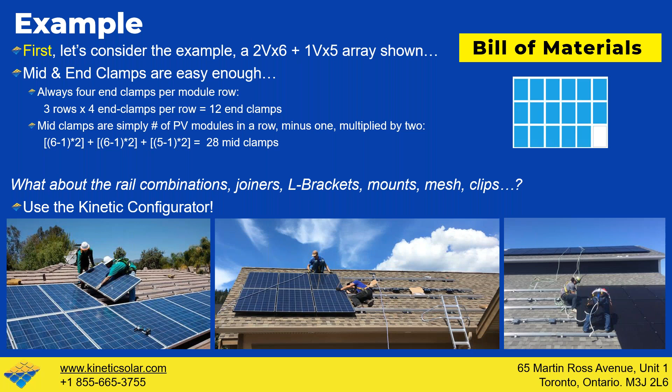So the configurator was developed just to make this as easy as possible. So when you go to our website and you open the configurator, you will see this screen. You'll simply just put in your project name and which region the project is located in.

Based on the project location that you specify, the wind, snow, and rain will be automatically pre-filled. And then you'll select if the terrain is going to be open or rough. And open is, of course, your open fields. Maybe it's adjacent to a lake or a pond, a big open area without much surface obstruction, such as trees in urban areas. And then rough would be quite the opposite.

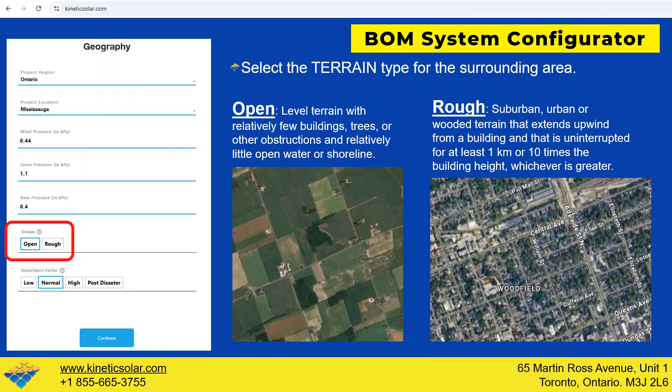Importance factor. So a low importance factor would be a building that has low direct hazard or indirect hazard to human life. This would commonly be a storage shed, maybe a warehouse if it's primarily designated as storing materials. But as soon as there's people being introduced, the lowest importance factor we would typically recommend is going to be the normal level.

And then high would be anything where there's a high importance, such as a school, a library, a hospital, and of course, any facility containing hazardous materials, such as if it's flammable or explosive gases held under pressure. And then post-disaster, which would be a gathering place of a very high importance. So this could be a stadium or other places like that.

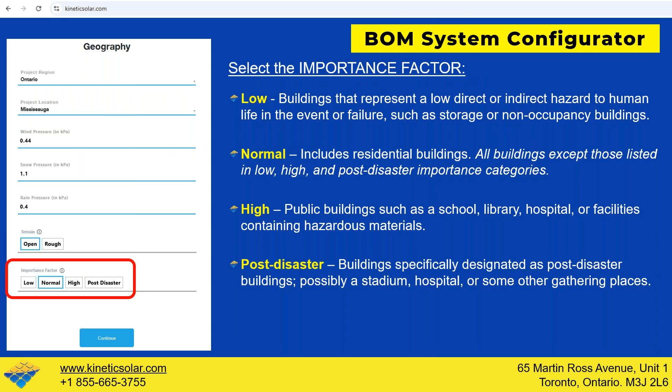Next, you'll choose your roof slope, building height, and roof type, if it's shingle or metal roof, and then your truss spacing. So the truss spacing you might specify as 24 inches. And if the system allows, you'll be able to enable a 48-inch connection spacing. So the truss spacing you select on this screen is separate from the actual connection spacing that could be permitted, which comes later.

You'll choose your module. So you'll choose the manufacturer, and then there'll be a filtered list of modules underneath that. If you ever find that your module that you're using is not included, shoot us over an email to any of our email addresses, info or engineering or myself, Matthew, at kineticsolar.com, and we will just get that updated.

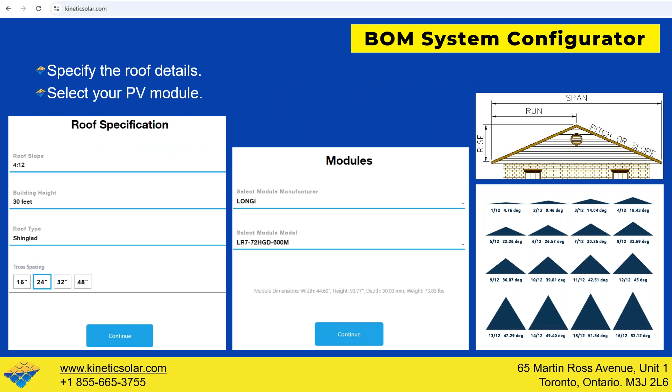So after you do that, you'll be looking at this screen. You'll see a visual representation of the layout that you specified. So here we have 3 rows of 6. Then you've actually clicked on that 3rd row last module indicated there, and that removes the module from the array to get our 2 rows of 6 and 1 row of 5.

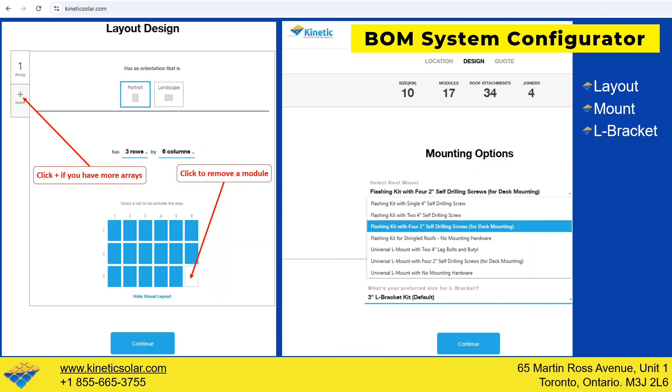On the next screen, once you're done with your layout, you'll specify the mount connection that you want to use. And in this one, we've selected flashing kit with 4 2-inch self-drilling screws for deck mounting. You'll also have some options here if you'd like to include a cable raceway, microinverter optimizer mounting kits, and of course, rodent guard protection mesh.

And then you're done. You have your bill of materials here, and you can take a look through. You can choose to add some spares if you wanted to have some spares added. And then you can print that report and deliver it to your contacts over at BayWa, and they'll be able to fulfill your order based on that bill of materials.

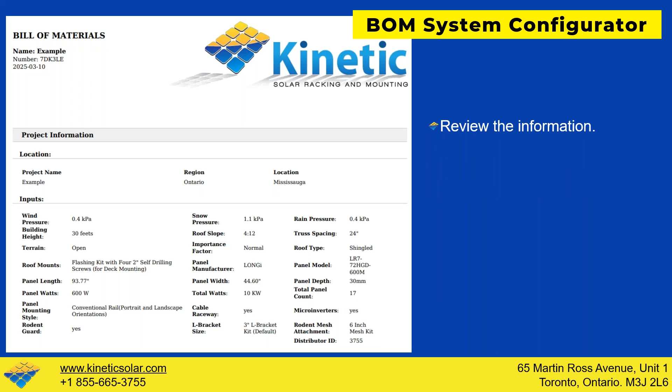You're also left with this report that you can download for your own project records. It includes all of the details you've input, and of course, the bill of materials that you can file away in your project files. In that report, you also have a good description of the racking composition. So you can see here where we have that 1 dash, where the rest are zeros. That 1 dash is where the 1 module was removed.

And you can see the rail composition is being explained here. Rail 0 is essentially your uppermost rail near the peak of the roof, and it's comprised of 2 138-inch rails in this example. And then if you look at rail 5, for example, the last one on the list, it's made up of 1 256. So you get a good overview of the composition of the racking system.

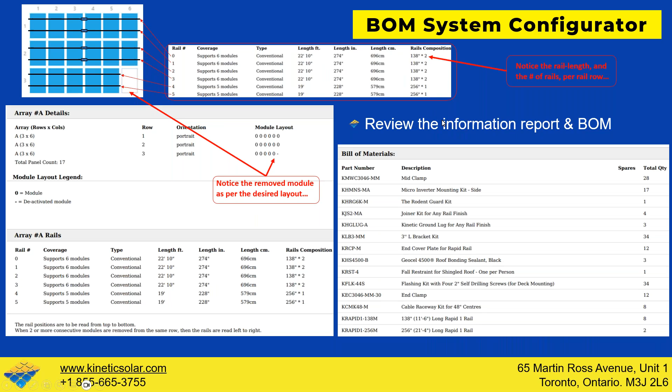Next, we're going to get into some of our components. I imagine a lot of you are quite familiar with some, but maybe not all. So if you have any questions, do feel free to put them in the chat. This, of course, is our rapid rail, our most popular rail, and specifically used for roof mounts.

Mid and end clamps, they come pre-assembled at a specific height. So when you order them, it's a 30-46, meaning that the clamp can accommodate a 30 millimeter to a 46 millimeter module thickness. Bonding is passed through the mid clamps. Now, if you see that exploded view of that mid clamp, that is our newest mid clamp, which actually integrates the bonding right into the bolt assembly. So you'll see that bonding washer essentially has little teeth that will come into contact with the module frame. Then bonding is carried through the module frames through the mid clamps.

Our clamps are available in black anodized or mill. Black is a really nice finish when you're using black modules up on the roof. It's a very nice aesthetic appearance.

And the mid clamps stay lifted when they're lifted. So as you might imagine, you're going along on your roof, you're slotting in all your mid clamps. They can slide in the channel quite easily, so you can move them over when you're going to lay your next module. But what I find personally really cool is that the mid clamp will stay lifted, so you don't have to grow a third arm to lift that clamp before sliding in that next module.

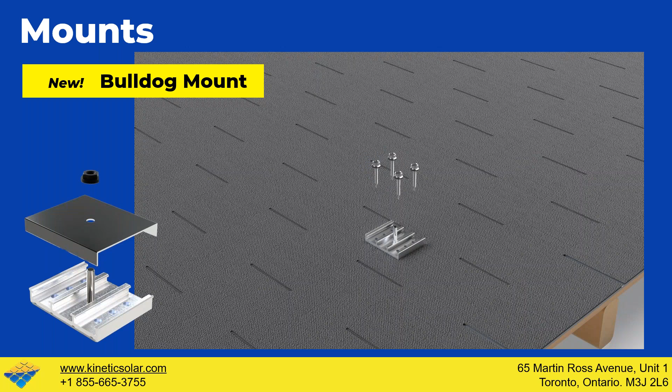Next, we'll get into some of our mounts. Here you can see this is an overview of all of our most popular mounts. So the Bulldog is our newest mount. So this is 4 screws into the decking or 2 screws into the truss. And of course, your decking mount makes it go super quickly, minimum of a 7/16 OSB or plywood.

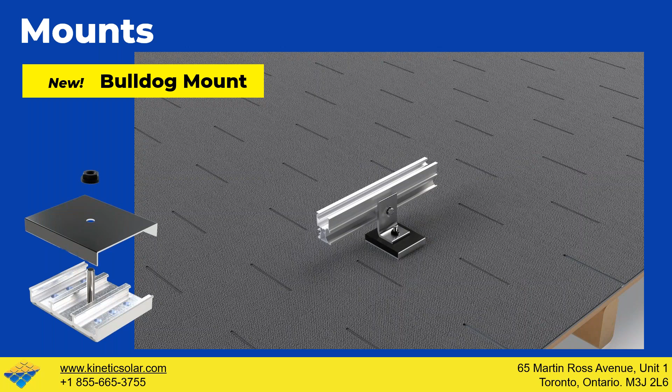So the Bulldog mount can be installed on the roof surface sheathing, trusses, joists, or reinforcing members. The pre-installed butyl layer underneath prevents leaks. So there is a butyl underneath, and if you see on this image on the right, we actually have a little lip that comes down of aluminum that retains the butyl. So even when you have your super hot summers, you can get them in Alberta for sure, super hot temperatures, that butyl will always stay retained with the mount under the pressure and held in with those lips.

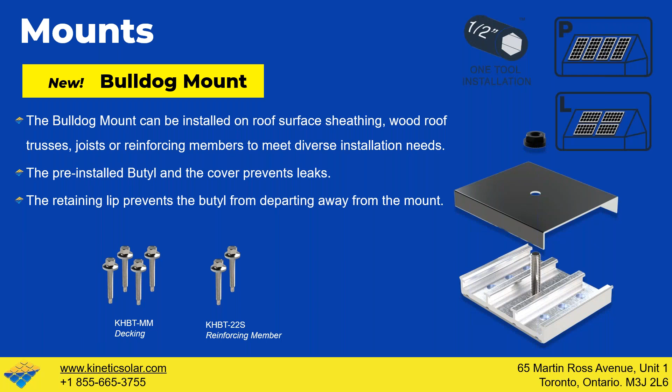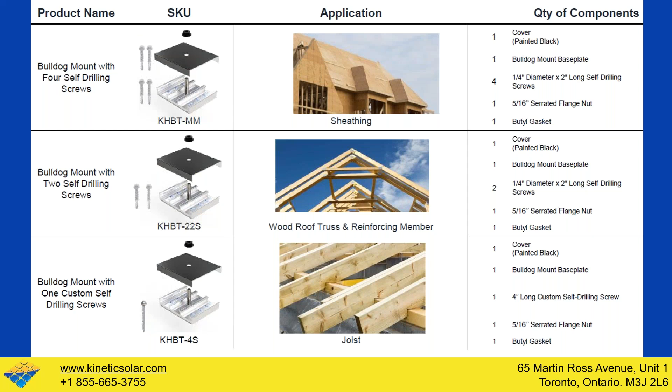So here you can see the 4 screw option and then the 2 screws for if you're mounting a truss. So we have all of our options here. There is a 1 screw option. It's not as popular. We would typically recommend the 2 screws, but if you're already using a single screw option and continue to do that, we do have approval for a single screw.

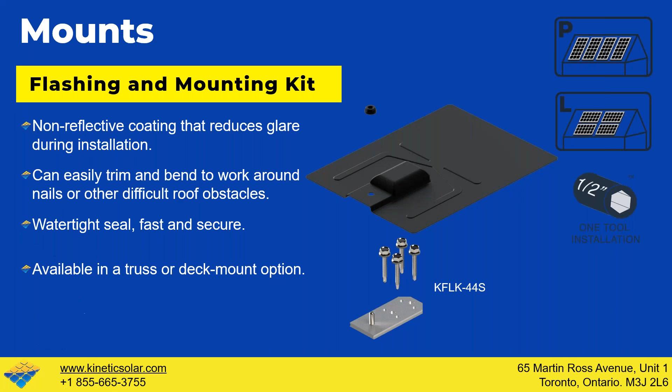Next is the flashing, probably our most popular, most well-known mount solution. So for asphalt shingle roofs, it slides up under the shingle and provides a weather-tight, watertight mounting solution. So it's a non-reflective coating. It's very malleable. If you've ever held our flashings, it's really quite unique. You can bend these and cut them quite easily if you have to get around a nail or some plumbing stack or anything like that.

Easy to trim, easy to bend, and they bend right back without wear. So you can bend these things in both directions 100 times. And like you might imagine with some metals that might snap, this one is just so ductile. You can just keep bending it and it'll go right back. So this is also available in a deck mount option. So here you can see our 4 screws, but otherwise it is 2 screws into the truss.

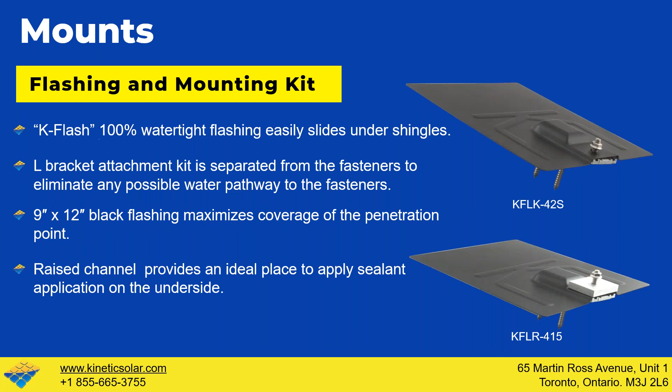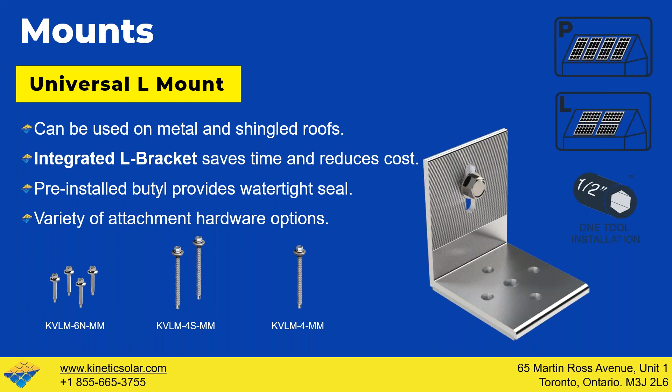Next, we have our Universal L. Very quick installs, of course, just taking the mount and integrating it right into the L bracket. So also available in a deck mount and truss mount option. It includes a butyl layer underneath to provide our weatherproofing. And it's a really popular solution here. I personally installed these and it makes for a very quick install.

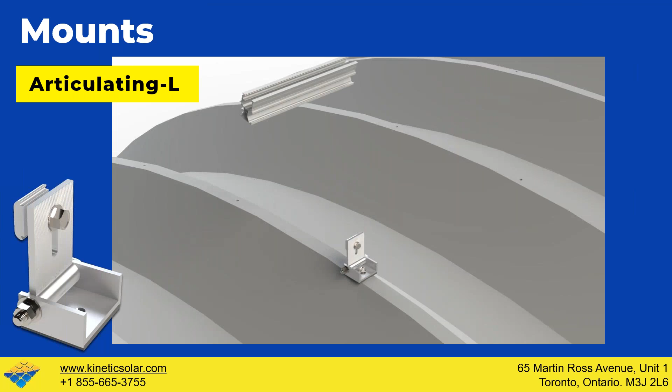We also have our articulating L, which was previously called the Quonset hut mount. It was designed specifically to mount onto Quonsets, but can really be helpful for any kind of change of plane racking solution. So you might have a roof at a steep slope going to a shallow slope, and you want to mount your modules right across that change of slope. You can do that with the articulating L.

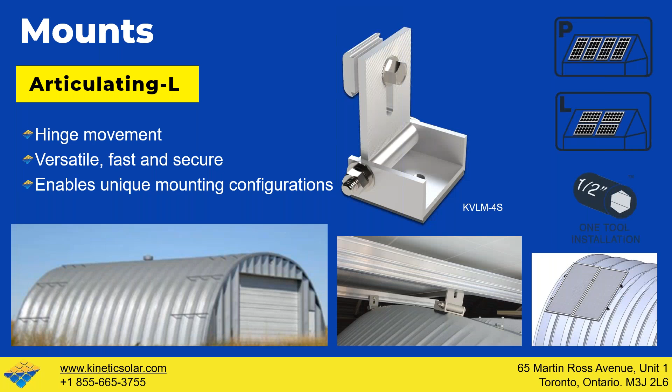So here you can see it installed close up underneath of the Quonset and how that looks. So basically those rails can rotate independently, and then they line up with where they need to be to mount the module.

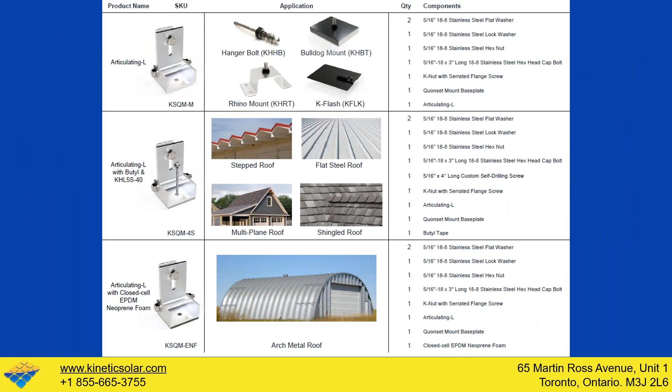We also have the giraffe mount, which takes some inspiration of including an L bracket into the mount. And this will mount so that your rails are sent up the roof slope. So you can still mount portrait. It'll just from the ground appear that the modules are mounted in landscape orientation, but they will be clamped on their long sides in portrait, as is the most cost-effective way to mount modules.

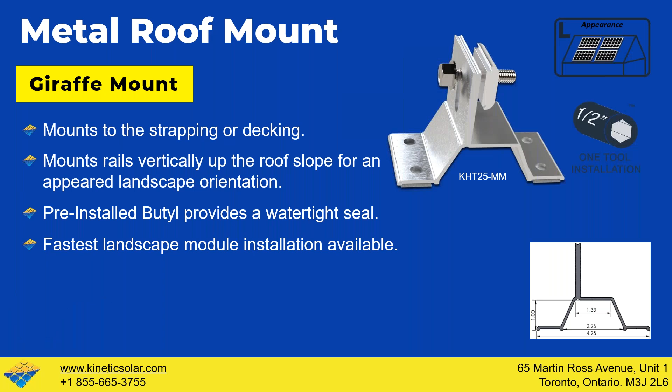And it mounts into the decking, if you have decking that is 7/16 thick, but most commonly on a metal roof you would have strapping, and these would be mounted into the strapping. You'll see as well, we have those little retaining lips there. So the butyl is held in place and provides a weathertight solution.

We also have the rhino mount, very similar to the giraffe, but the rhino does not include the L bracket. This provides you a number of unique solutions. If you wanted to mount diagonally across the roof, so rather than sending rails up the slope or across the slope, you can go diagonally across the slope. And this can create really nice aesthetic finishes if you have a certain feature of roof that you're trying to navigate around. It can be very helpful.

So it's a very tall gap there. You can straddle a seam or a rib of a metal roof and still tap into the strapping there. You can see that's a 1 inch high that it can jump over.

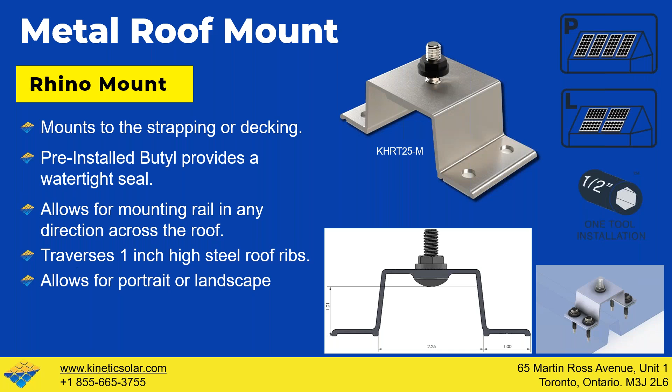Of course, we have hanger bolts. These are our custom hanger bolts. They are self-drilling for lumber, so you don't have to pre-drill. If you were to pre-drill, you just want to make sure that you're using the right size of a drill bit so that you do get all the thread that's needed for that pull-out strength. So it's available in a 2 inch, a 4 inch, and a 5 inch. The 2 inch we haven't listed here. It's not as common, but some specialty projects do require it.

And what's cool about the 2 inch hanger bolt is that it can be self-threading. So if you were drilling into, say, a steel Z-purlin on a commercial building, and you wanted to mount hanger bolts into that steel Z-purlin, or Zed-purlin, because we're in Canada, you could accomplish that with the 2 inch self-threading hanger.

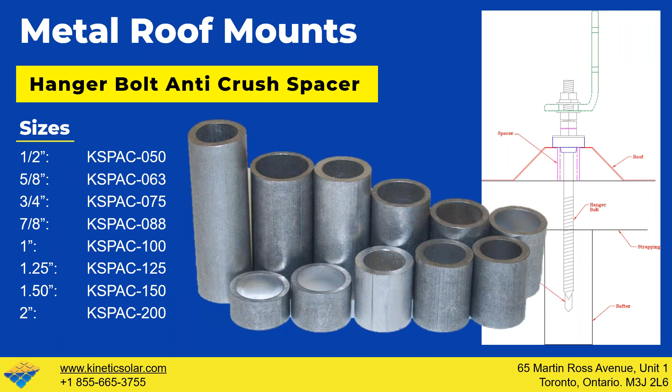Now spacers. If you have an air gap, as depicted on the image on the right, you can see that we're on the top of that trapezoidal roof profile. There is an air gap underneath. Now, if you don't have that spacer inserted there, what's going to happen is when you tighten down that hanger bolt, you're going to compress and crunch that metal roof profile. That'll create a place where water could collect and get in underneath the roof. So including the spacer allows you to really tighten that hanger bolt all the way down without crunching that metal roof profile.

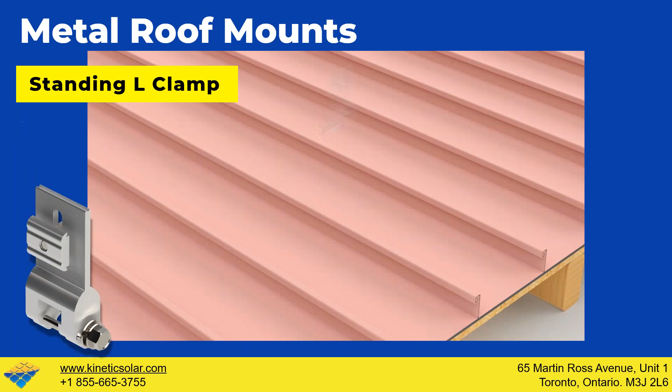Of course, we have our standing seam, a very popular solution, very universally applicable to most standing seams. And on the cut sheet, we actually have the dimensions of the cutout profile, so you can make sure that it will fit the standing seam that you're looking at.

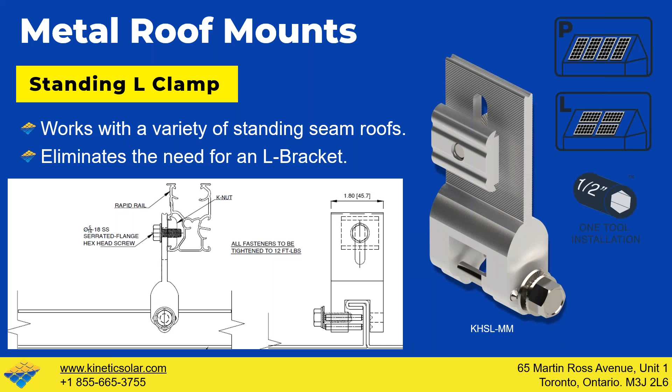And a really great feature of this standing seam mount is that the bolt that you tighten isn't what's coming into contact with the metal roof. The bolt that you tighten is going to push these pins in, and the pins don't rotate and will not strip the coating on the metal roof. So it won't cause a rust point. And that's definitely a big feature to highlight to any end customer, that you're using a product that won't damage their roof.

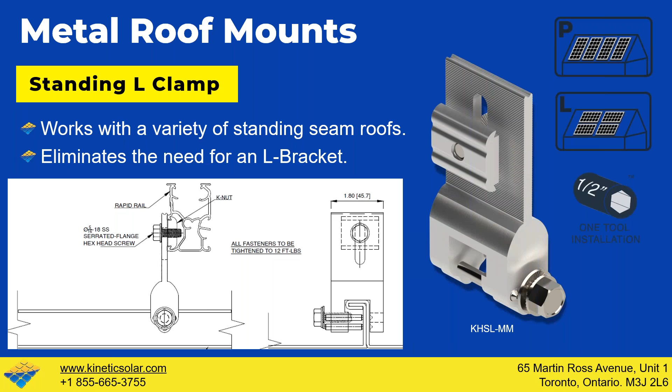Accessories. So here we have our top or side equipment mounts. So whether you're mounting a junction box, a microinverter, an optimizer, or anything else you decide to put up on the roof, you can accomplish it with the equipment mounts for the top or side of the rail.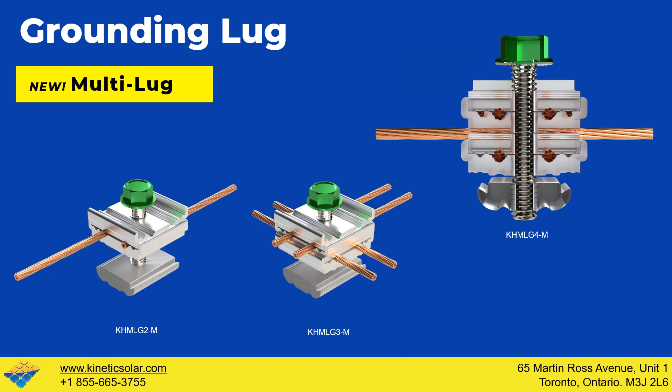Next, we have our cable raceways. So these are available in kits. So if you're using an on-center connection spacing of your mounts at 16 inches, you would use the 16-inch kit, and so on. If you're at 48 inches, you'd use the 48-inch kit.

Of course, this would provide a full cover of the cables, so it can be a really nice mechanical protection for your conductors. And it is something that would be required to attain a fireproof rating. Part of the fireproof testing is they actually plunge a fireman's axe straight through the modules on the roof. And with this cable raceway, your conductors would be fully mechanically protected.

The cable clip tie. So a lot of people are using zip ties. I've done it for sure. But what can happen is that when you wrap the zip tie all the way around the rail, you're going to cause stress points on the zip tie itself. Now, of course, some zip ties, especially premium ones, are very strong, and that wouldn't necessarily be an issue. But I have seen, unfortunately, some zip ties that are not UV rated and also not the strongest, where they will cause failure points, and those cables might eventually come loose off the rail.

So what this product does is allows you to clip these all along the rail so that when you come by later to run your wires, these can already be in place, and very, very quickly, you just put that in and then zip it shut. So it can help save time on the roof as well.

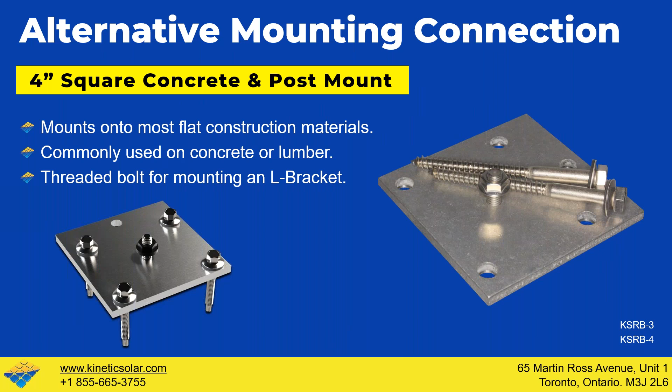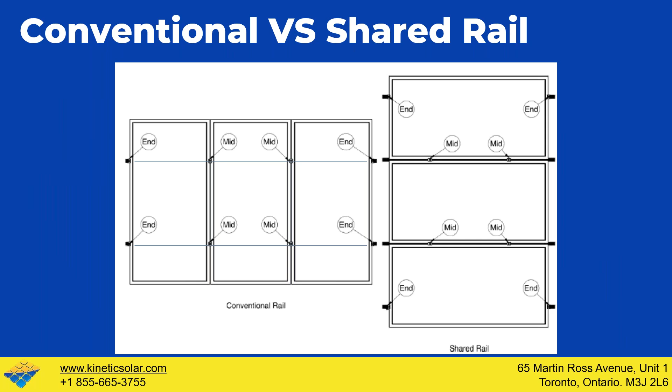Here we can see a direct comparison of the same roof layout. You can see that we are using 30% less rail, 30% fewer mounts, and almost the same number of clamps. So the big difference here is you're using less rail and fewer mounts.

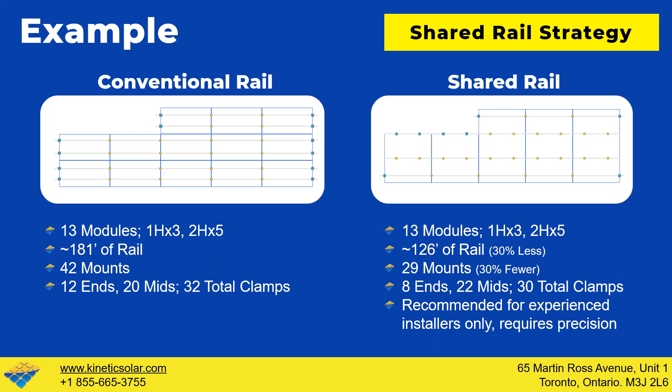That's less time on the roof. We don't recommend this to someone doing it for their very first install, but for those familiar with the processes of installing a roof mount system, there is a slightly higher level of precision required when installing a shared rail system.

Since it is slightly different, I wanted to show a graphical representation of where exactly those mid and end clamps go. You can see the first rail at the top and the last rail at the bottom are what we would refer to as conventional rails.

They're brought in from the edge. You're clamping in the green zone, but you're clamping on the short side. Now, all of the rest of the rails are actually clamping on the module's long side, still in the green zone, but you have a bit of short side and long side clamping going on here. And you can see where those end clamps are located.

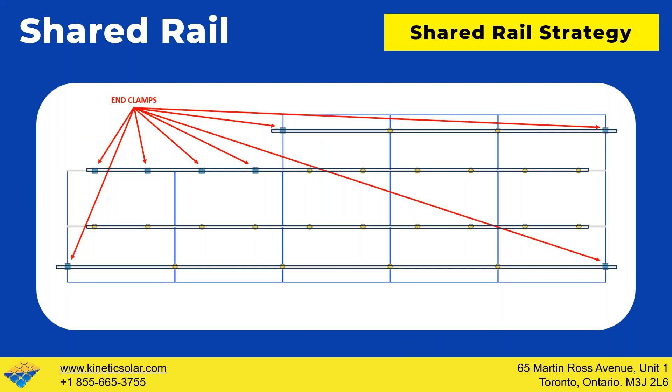This isn't to clamp, this isn't to do anything other than just provide a guide, to help that process go smoothly, make sure that the spacing is being maintained, and it actually gives a slightly larger surface area for the module to sit on.

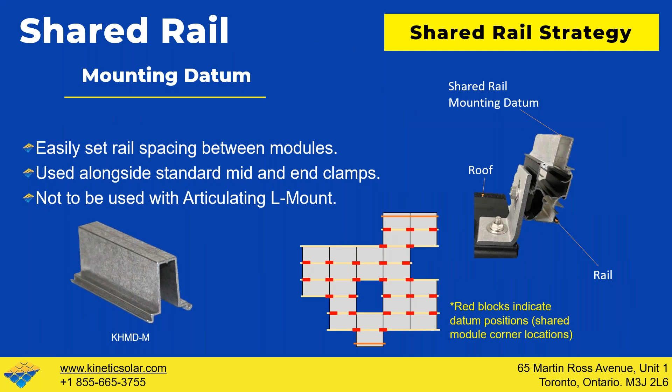And you don't need someone to stand there and hold the module in place before the next clamps go in. Once you have the datum in place and you're putting your module up above it to rest on it, it can just sit there without sliding off the roof.

Next is our ground mount. This is our Gen 2 static. Some people might be familiar with this. This is with our round bifacial rails, and we have these datum holes that help guide the installation for ease of install.

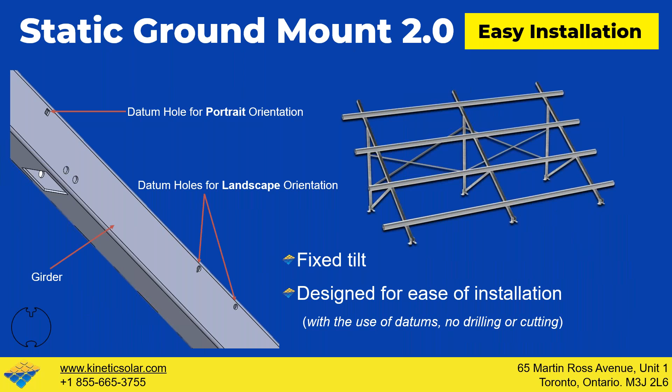So it's suitable for PV modules up to 2450 by 1160.

Minimum shadow for the backside of the bifacial modules. So we have our round rails, and we've run some science on those rails, shining light from the back. What's interesting is that a round profile actually casts less shadow onto the modules, providing higher reflectivity and backside energy efficiency.

So we engineered this for wind loads Q50 up to 1 kPa, snow loads of 2.5, and rain loads of 0.8. Keeping in mind nationwide compatibility, this has really been designed quite robustly for Canada.

The frame itself is steel, hot dip galvanized, and the rails are extruded aluminum. It's a fixed tilt of 40 degrees, and it comes with our long warranty of 25 years. It uses all the standard mid clamps, end clamps, and ground lugs.

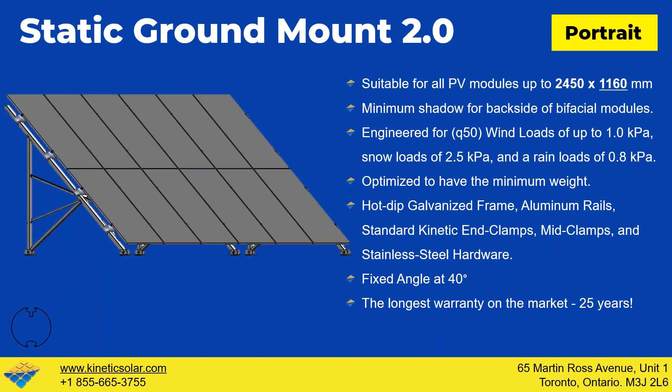Here we can see another angle. You can see here how the round rails are being mounted to those square girders. We have our square U-bracket to accomplish that, and the datum pins are essentially what holds it in place.

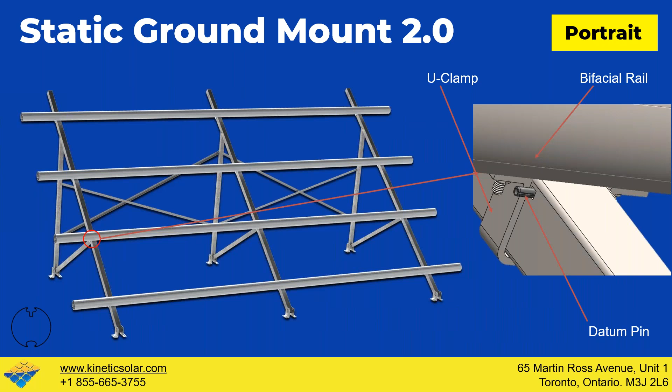Here's a cross section of that bifacial rail. It can accommodate spans of up to 125 inches between the supports, and cantilevering over the edge 52 inches.

We also offer these end caps, which prevent rodents and birds from nesting on the inside of the rails. The caps themselves we make in-house, and they're certified and rated within a wide temperature range of what you could expect to find.

The foot design allows for half-inch increments of adjustment. That is those diamond pattern holes there of how the foot actually mounts to the square tube strut.

So what that means is that if you're starting your install, you want to mount your first foot on the highest point of the foundation at the lowest hole. Then when you go to mount all of your other feet at possibly, but hopefully not, different heights, because your helical pile might be a little bit higher over here and lower over there, or your concrete ballast.

This gives you a good amount of adjustability vertically and slightly horizontally, just to make sure that you'll have a level system, even if your foundations are not all exactly level.

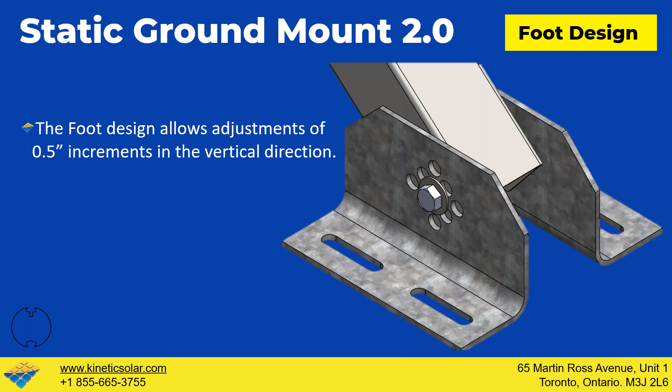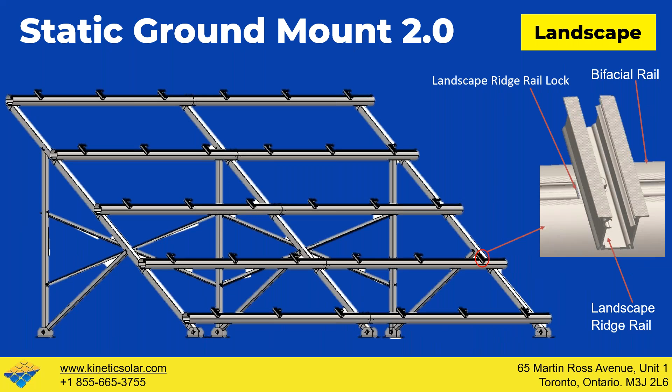You can see on the bottom side channel, we have that bifacial rail mesh stud nut. That's a separate component that can be ordered separately to mount that 48-inch mesh. It makes that installation of the mesh quite easy, using a K-nut of our standard K-nuts to fit into that channel and then mount the mesh with a K-nut and bolts.

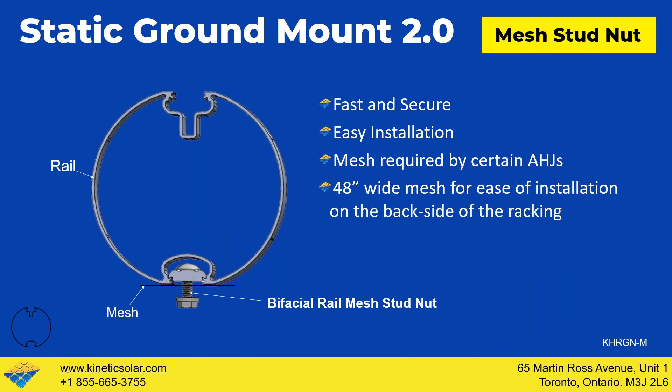We're excited to announce our new Gen 3 adjustable ground mount. You can see that here. It stocks and ships on a pallet.

So this is something that we're really excited about, being able to ship these on pallets. We have a really nifty video here where you can see the assembly coming from the pallet to assemble the adjustable tilt rack.

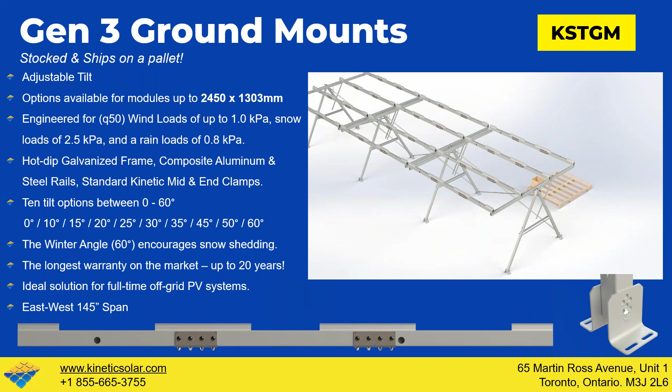The rack itself offers 10 different tilt adjustments if you include 0 as one of them. Someone might be inclined to mount the rack at 0 — let's say you had a hurricane passing by, the 0-degree tilt would be preferable for that. You can go up to 60 degrees for snow shedding in the winter, or if you're just further up north, you might even just leave it at 60 all year round.

So it's hot dip galvanized, composite of aluminum and steel rails. The rail itself we can see along the bottom of the screen here, and what you see there are the U-brackets that join them and splice these rails together to form longer sections.

So each table on that rack image, we have 3 articulating tables, and each one will tilt independent of the others. We have those adjustment bars where you just slip off a cotter pin, pull it off the pin, then move the bar, reset it, and then you've got your new tilt.

I've adjusted some of these when we did our most recent show, and it's very easy. We have dampeners that help make the movement easy, and of course if you were to let go for a quick second, it's going to dampen the movement of the table.

So we actually have really incredibly wide spans here that will reduce the number of foundations you require. Our east-west span on this rack is 145 inches, and we offer a 20-year warranty on the adjustable ground mount. Ideal, of course, for off-grid, as off-grid clients want to get every ounce of energy they can from the sun, so being able to reach whatever tilt the end client desires for the season is key.

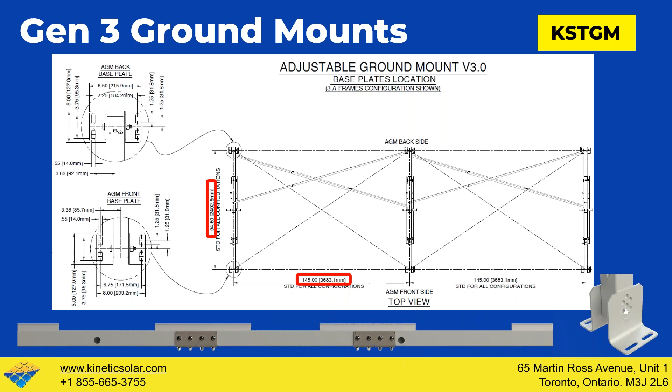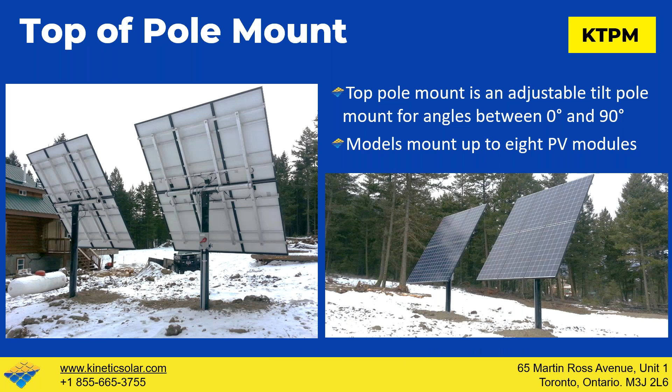We of course have our top of pole mounts. We are looking at expanding this category as we see a bit more demand in this ground mount category. We can accommodate up to 6 modules on a single post using a 6-inch Schedule 40 post. These can mount fully vertical, so you can mount 0 to 90 degrees. It says mount up to 8 PV modules - that's if you're using the older, smaller modules like we were discussing before the presentation. But it'll be 6 of the big 1134s or 1303s.